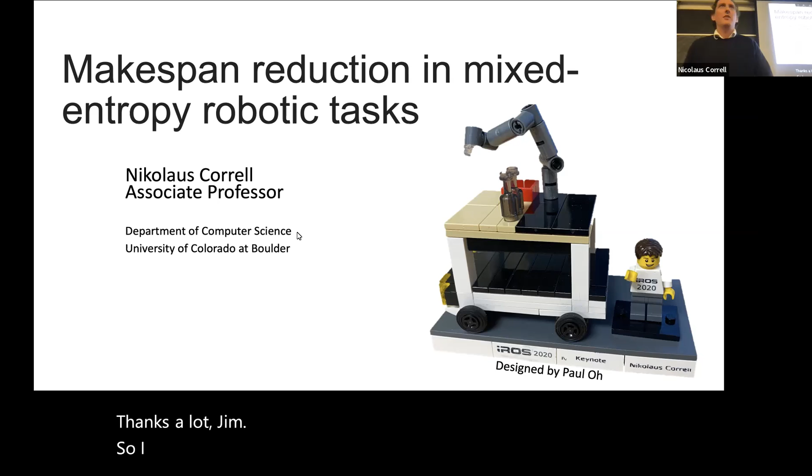Thanks a lot, Jim. So I will talk about mobile manipulation, robotics, and the things that I've done in the last 5 years in that space.

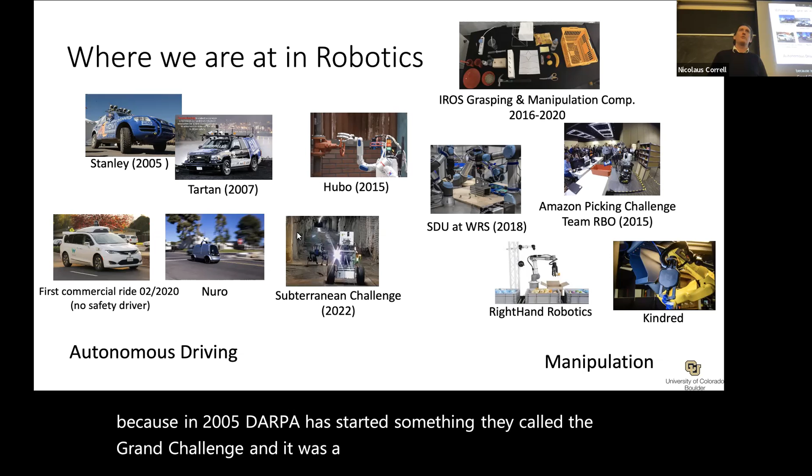I want to start with a little overview of where we are at in robotics, and what I chose is competitions that really drove the field. In 2005, DARPA started something called the Grand Challenge, a car that had to drive through the desert to Las Vegas. The Stanford team won that with the Volkswagen in 2005. Then 15 years later, we had the first commercial ride from Waymo with no safety driver in 2020. And we also now have companies that deliver food and things like this.

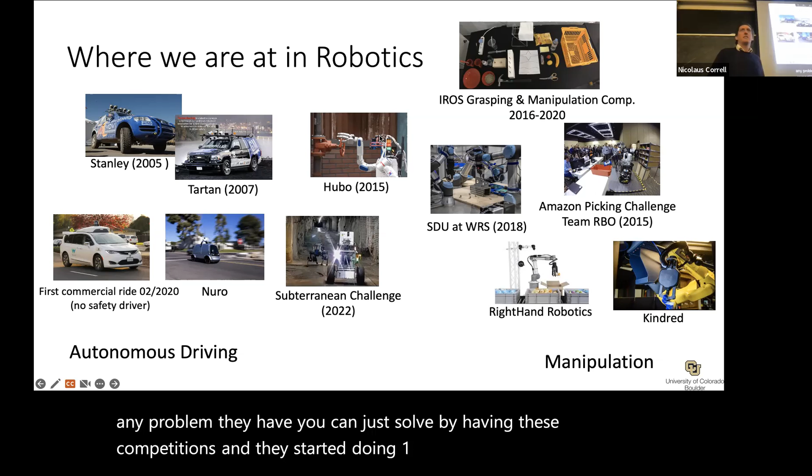DARPA got really excited about the idea that basically any problem they have, you can just solve by having these competitions. They started doing one in mobile manipulation with robots walking around that had to open this fire hose thing and drive a car and things like this. This was a complete disaster because the robots all flipped over and things like this.

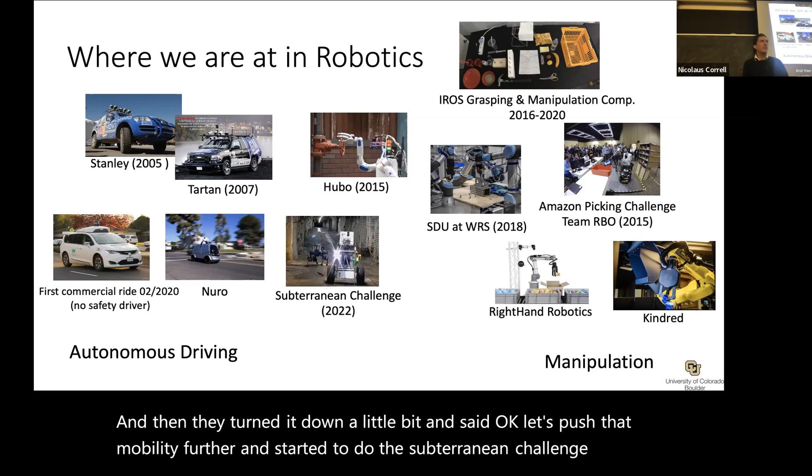And you always see videos like this in our classes. Then they turned it down a little bit and said, okay, let's push that mobility further, and started the Subterranean Challenge, which Chris Heckman, Sean Humbert, and Eric Frew won third place and $500,000 this year, which is really great. But manipulation is just too hard right now.

At the same time, the research community has started to organize competitions at conferences, and it always looks like this: there's a bunch of stuff that they think people have at home, and ideas like, oh, take the scissors and cut something out, and then they just see what happens. We've been participating there from 2016 to 2020.

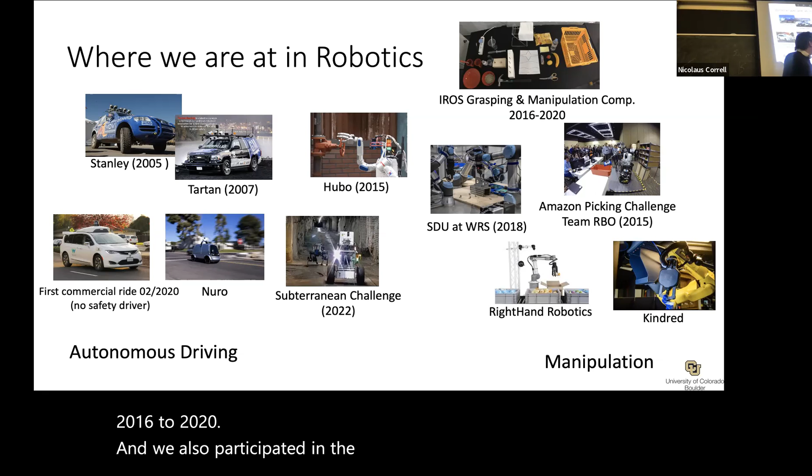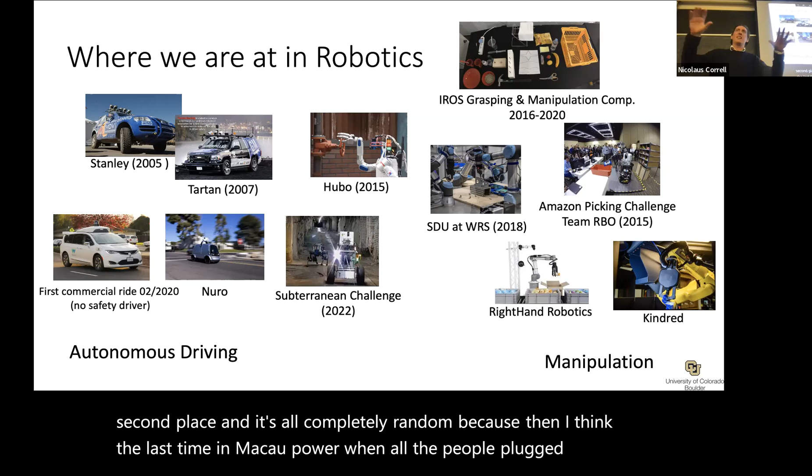We also participated at the World Robot Summit, which is an industrial robotics competition, and at the Amazon Picking Challenge. We never won anything, of course, but we did participate and got second place, and it's all completely random. The last time in Macau, power, when all the people plugged in the robots, started shaking, the robots turned off, nothing worked anymore. So competitions are really not the environment to test things.

But it didn't really become a commercial success. Amazon did this picking challenge a couple of times, and now we have Right Hand Robotics, which is a rather big company, and Kindred, which was sold to Ocado, an English grocer.

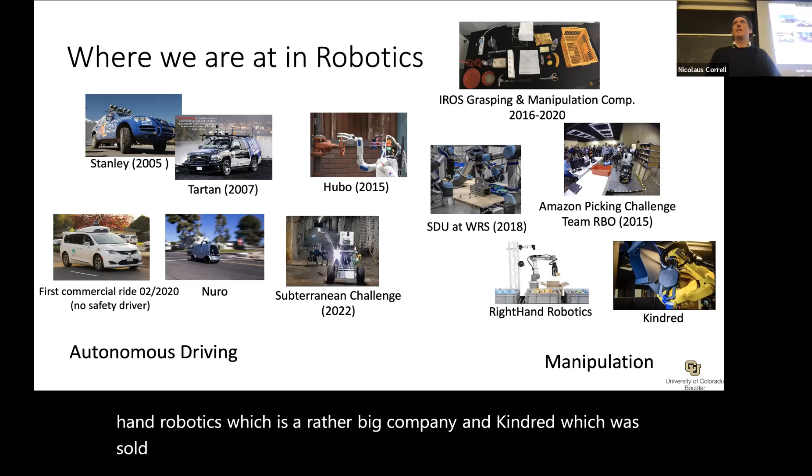But I think it's a huge opportunity still, because when you think about it, the whole consumption chain from raw materials—they get made somewhere, then shipped and stored, then shipped again, then they get consumed, and then they get recycled—technically all of these things require a lot of manipulation along the way.

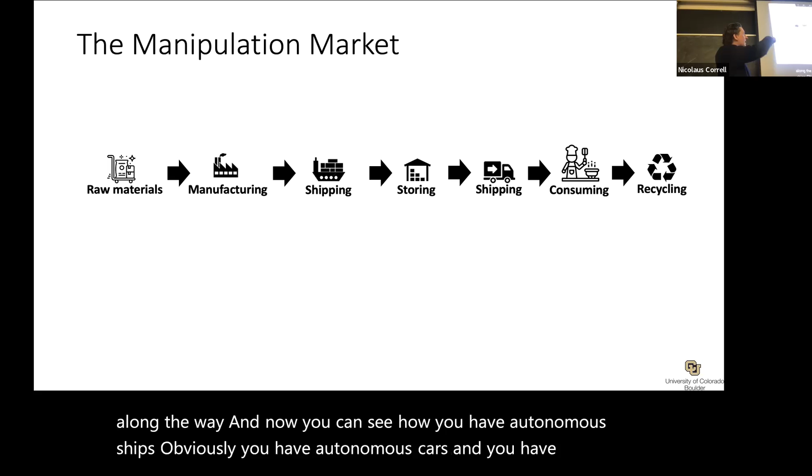Now you can see how you have autonomous ships, obviously, you have autonomous cars, and you have autonomous carts inside the storing facilities or the manufacturing centers. So people are working very hard on automating all of this, but what they cannot do is automate all this manipulation.

When you look at companies, for 30 years big companies have offered manipulation of that nature. In the car industry, people do welding. Recently you might have seen Boston Dynamics made a big splash unloading trucks with these weird robots. Then you have warehouse robotics.

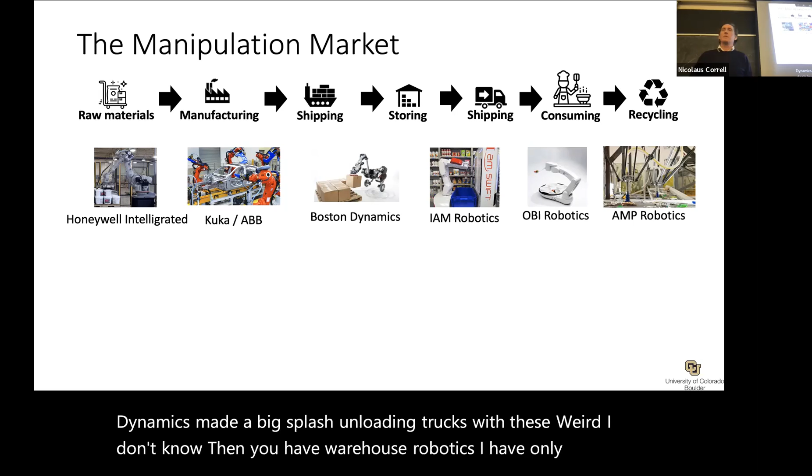I have only one example, but there are hundreds of companies. IAM Robotics—for consuming, this is a robot that can feed people who have Parkinson's or are otherwise handicapped.

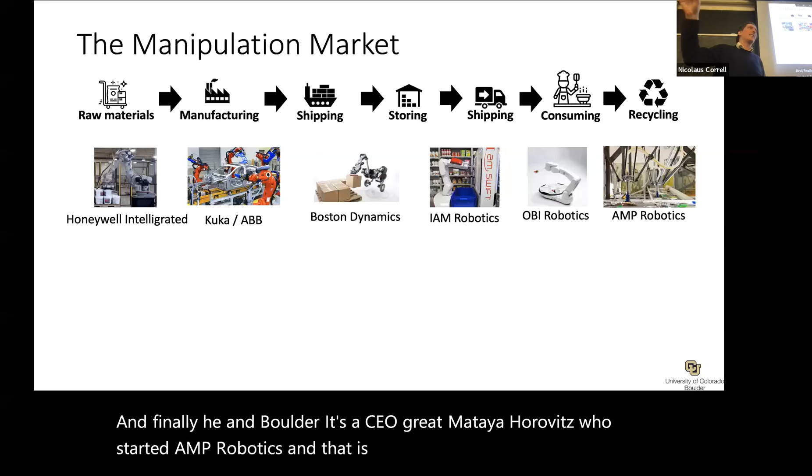And finally, here in Boulder, it's a CU grad, Matanya Horowitz, who started AMP Robotics. That's about picking trash out and recycling. They raised a lot of money and are very successful right now with that company.

But all of these are very specific solutions. What we really want in robotics or computer science is general manipulation, and to move away from these purpose-built things. I can do all of these tasks you've seen because I have two hands and eyes, and I'm reasonably skilled to do these things, but robots are still far away.

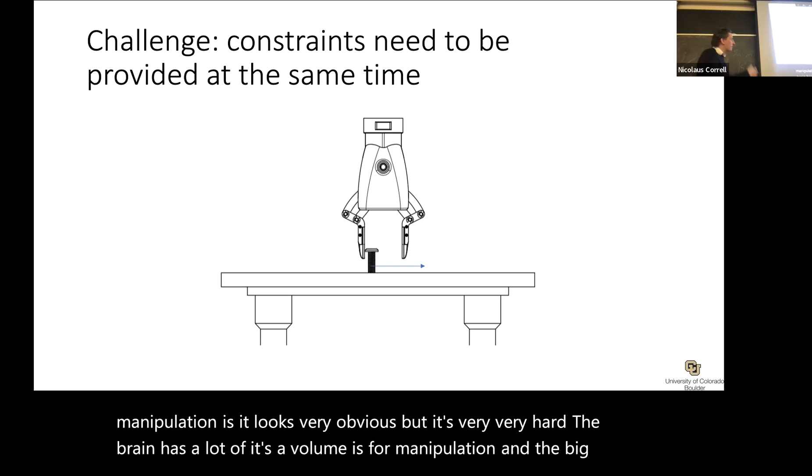So let me start with a tutorial on manipulation. The problem with manipulation is it looks very obvious, but it's very, very hard. A lot of the brain's volume is devoted to manipulation. The big problem is providing constraints on such a thing at the same time.

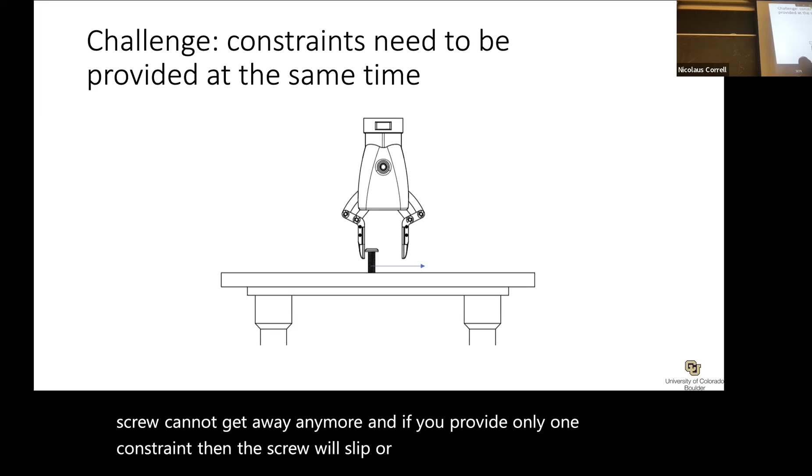When I say constraints, I mean that the screw cannot get away anymore. If you provide only one constraint, the screw will slip or fall. Once you're ready to provide the second constraint, then it's gone. So it's difficult. One way to do this is to increase the accuracy at which you perceive the thing you want to manipulate. Then you can plan better.

And that's how we started out. We came up in 2016 with a tactile sensor. I think I showed that before, but just a little history—this is one of those competitions.

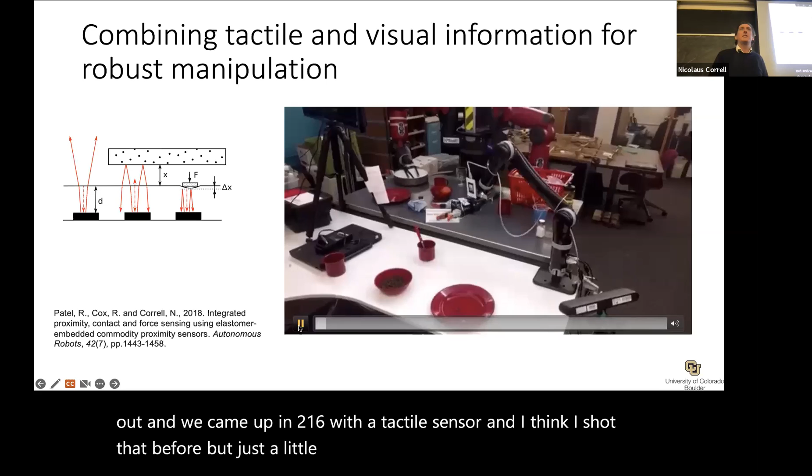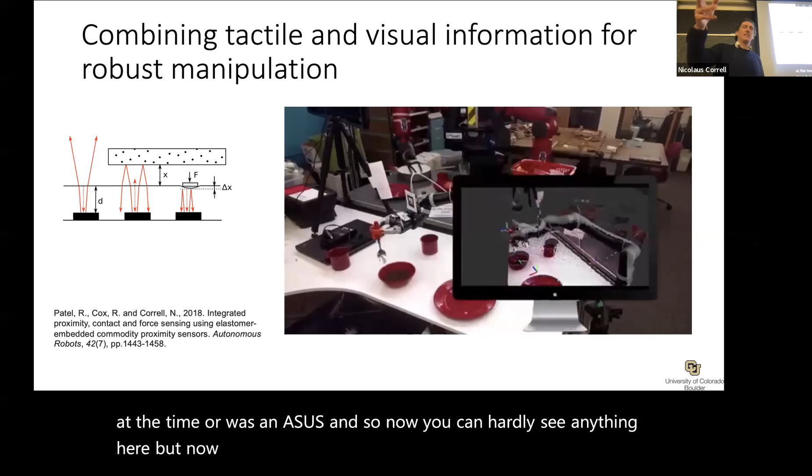Now the robot has these fingers that are augmenting that very bad Xbox Kinect we used at the time, or was it an Asus. You can hardly see anything here, but it goes and figures out where the spoon is, then uses the tactile sensors to avoid smacking it, and can grasp it. Then there were tasks like getting beans out of a container and pouring them over, and they got points that way.

So I got really excited, and we started a company to sell these tactile sensors. I did sell them, but then—I'll get to that later. So this is how it looks.

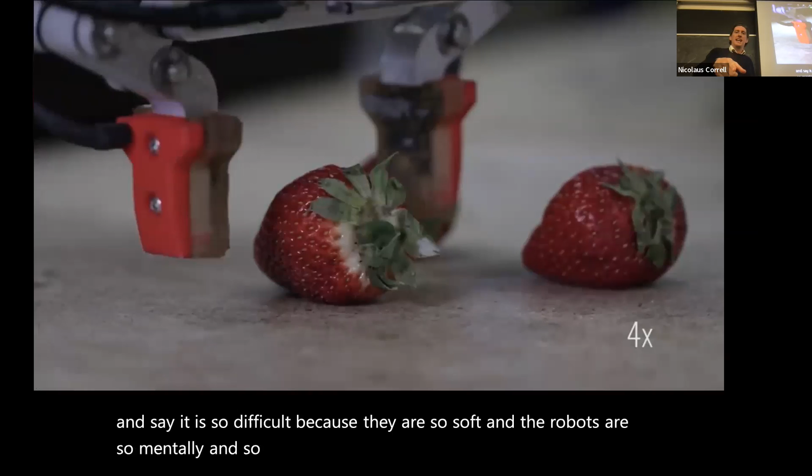We came up with these sensors and made a hand, and then we grasped strawberries. People always grasp strawberries and raspberries and say it's so difficult because they're so soft and the robots are so metally. The idea was to use these sensors to detect the touch event, which it actually does, and also so that you don't squeeze into the strawberry.

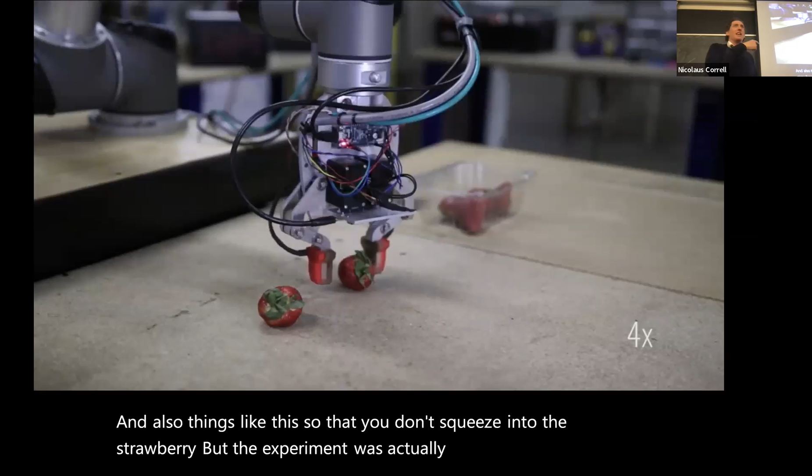But the experiment was actually funny, because my people then told me they didn't actually use the sensors—too lazy, because it's too much code and too much work. And the thing is, it actually works without the sensors.

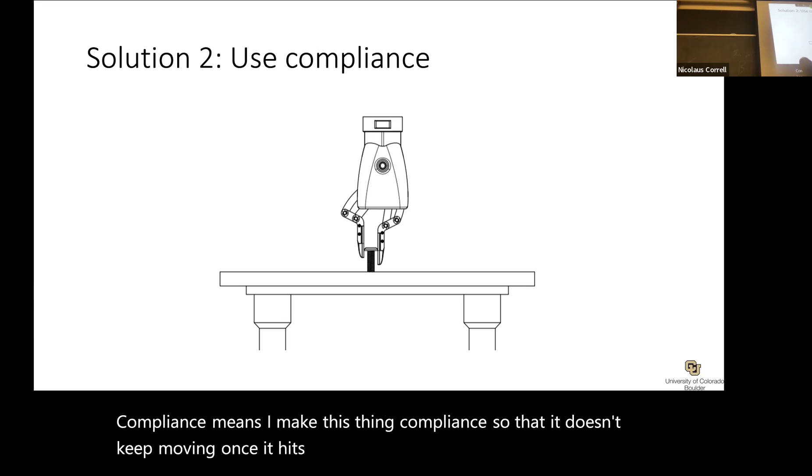The reason is you can use compliance. Compliance means I make this thing compliant so that it doesn't keep moving once it hits something—it stays there, and then the other finger moves in. You can do that so gently that you can even pick up strawberries.

When we realized this, we forgot about the tactile sensor, and we just said, well, the key is—which happened also at the same time—Intel came out with a really good camera that could see very close. So we built a hand that has the Intel RealSense here in the center, with two individual motors that can do torque control.

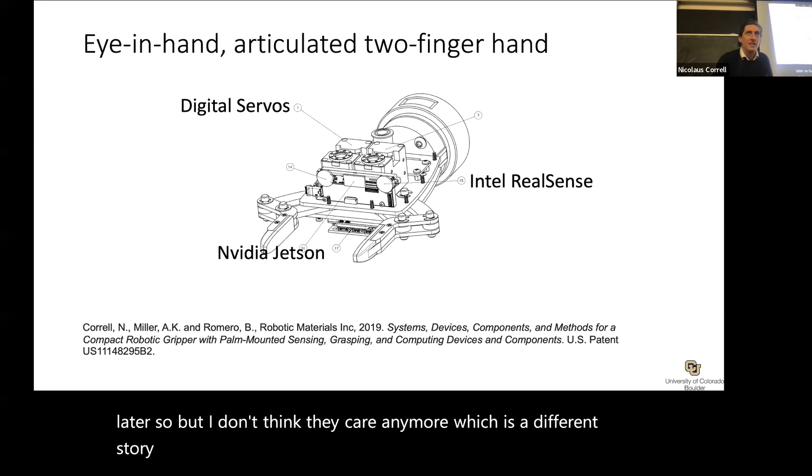We got a nice patent, and now Google also has a patent like this, but it's later. I don't think they care anymore, which is a different story, because right now robotics is not the hottest field on the planet. But it's nice because I think this is a very good idea to use this camera in the hand with these articulated fingers.

So in case you don't believe me, which you shouldn't by default, you can get these strawberries the same way without these sensors, just using motor control so gently that you don't squeeze them.

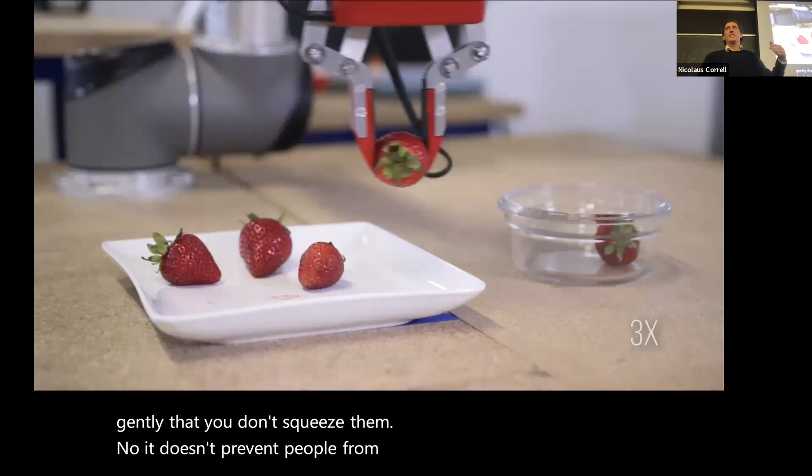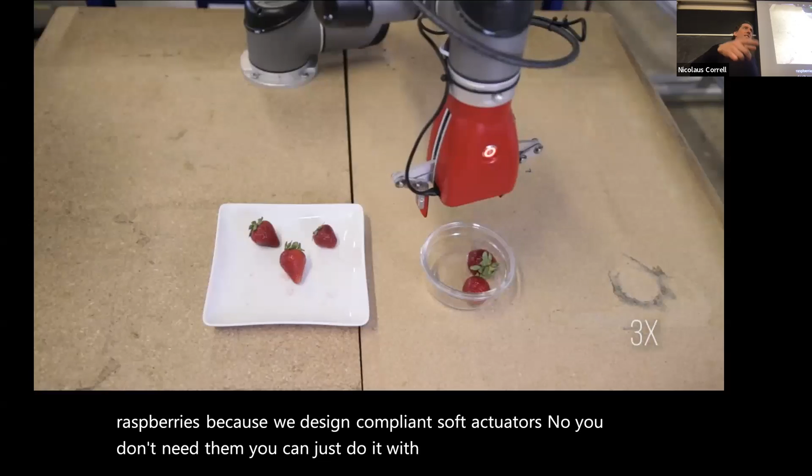Now, it doesn't prevent people from publishing papers on soft robotics saying, now we can finally grasp strawberries and raspberries because we designed compliant soft actuators. No, you don't need them. You can just do it with conventional mechanisms, and you're better off, because this hand can do anything, while the soft gripper can only grasp raspberries—otherwise it's too floppy to do anything.

So that's that. There's a picture which we have in this patent.

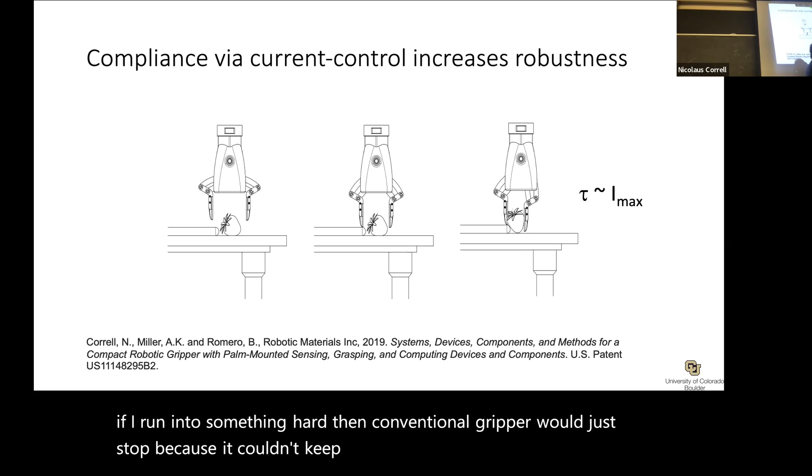The idea is if I run into something hard, a conventional gripper would just stop because it couldn't keep moving. But this will just move the other finger in a little more until it provides enough force onto the object to take it with it.

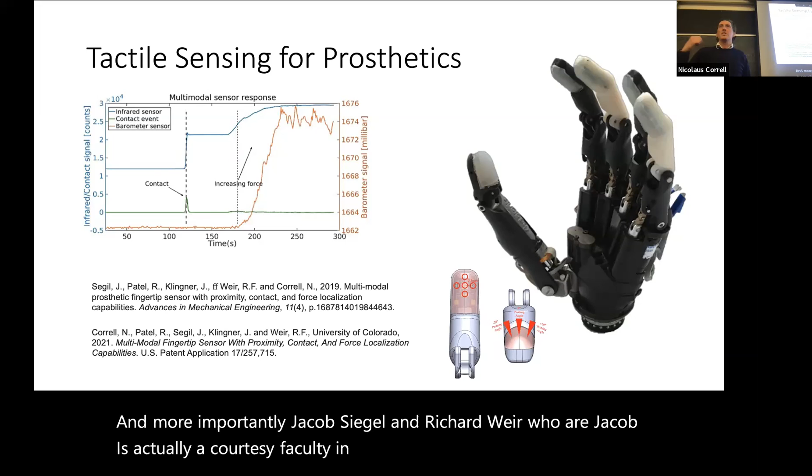Now, the tactile sensor is still a success. People use it in Japan, and more importantly, Jacob Segil and Richard Weir, who are, Jacob is actually a courtesy faculty in our department, and Richard is in Anschutz, and they do a lot of work on prosthetics.

And there it's very interesting because you don't have a camera, but prosthetic people cannot feel anything. So what we've done is we took this sensor, and it has these nice properties that it can detect contact, and then you see as you increase the force, you finally touch something. But not only that, it uses multiple different sensors together, and there's some machine learning.

I don't want to talk about it much, just so you see when you set out somewhere and you want to solve some industrial problem, nobody cares, but then you find a different application, which actually is quite successful right now. So with this hand that we built, we could do a lot of really cool stuff.

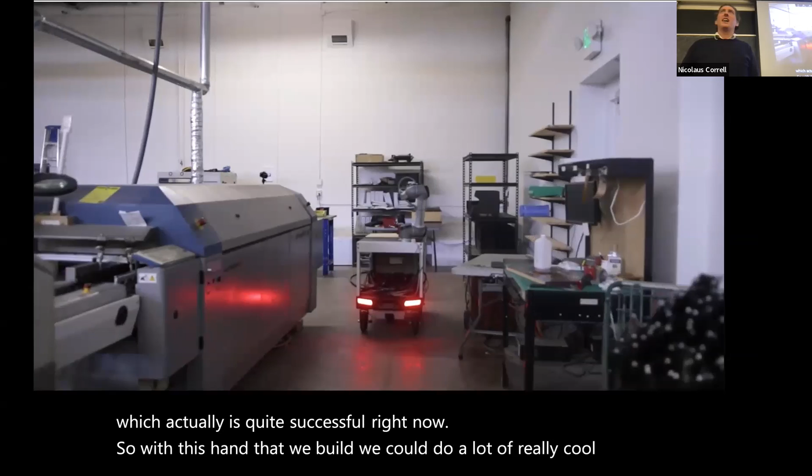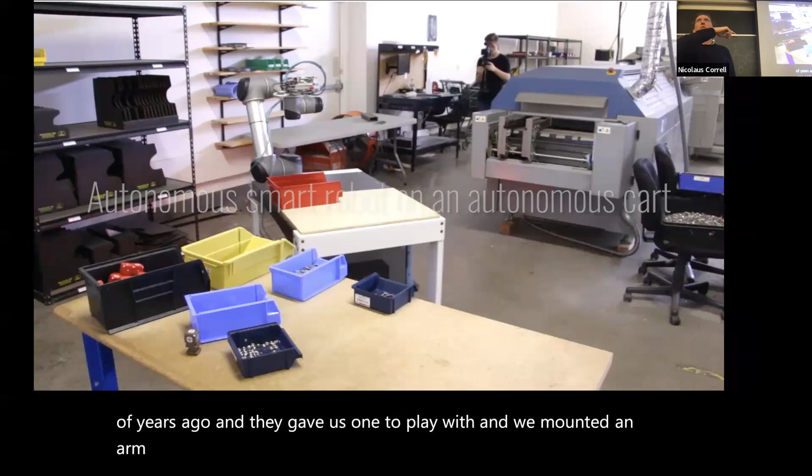And this is the Canvas cart that is a spin-off from our students a couple of years ago. And they gave us one to play with, and we mounted an arm. So you saw this was what I had, the Lego figurine somebody made for me, which is this thing. And it can now go and pick out screws from these containers.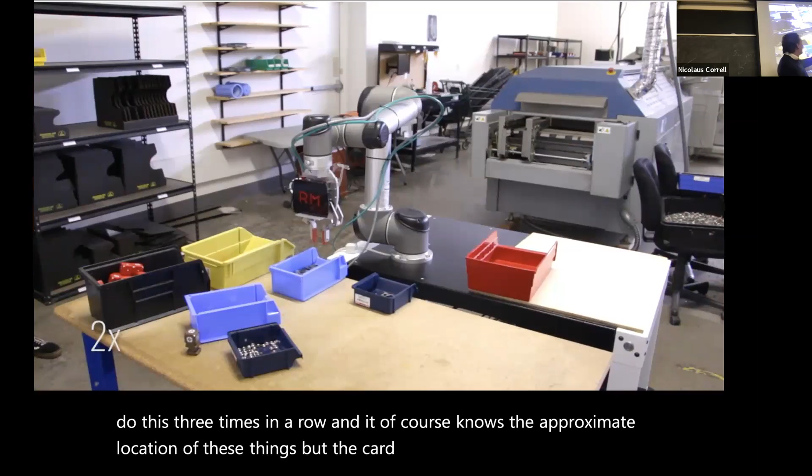In robotics, you see a lot of one-off things where it only works once, but then never again. So what we tried in this video is to show that it can do this 3 times in a row. And it, of course, knows the approximate location of these things, but the cart has maybe 10 centimeter accuracy. So it has to find the bins, and then it has to look inside the bins, and then it has to think about how to grasp them out.

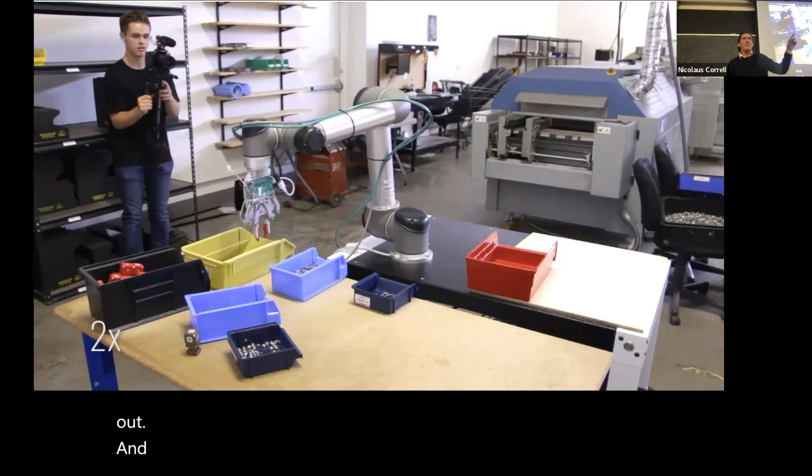And interestingly, nobody wants to buy such a thing. It looks like something that I, as a computer nerd, thinks it sells like sliced bread, but no, I can assure you there's very little commercial interest into this. And I know, I mean, it's complicated. We can talk about it, but now other companies, actually Amazon just shut down. They bought it for a few hundred million dollars, and then they just shut it down, this whole canvas thing.

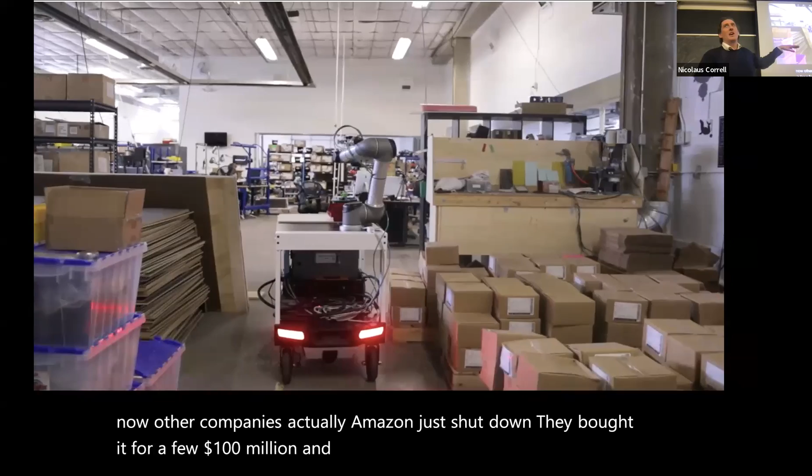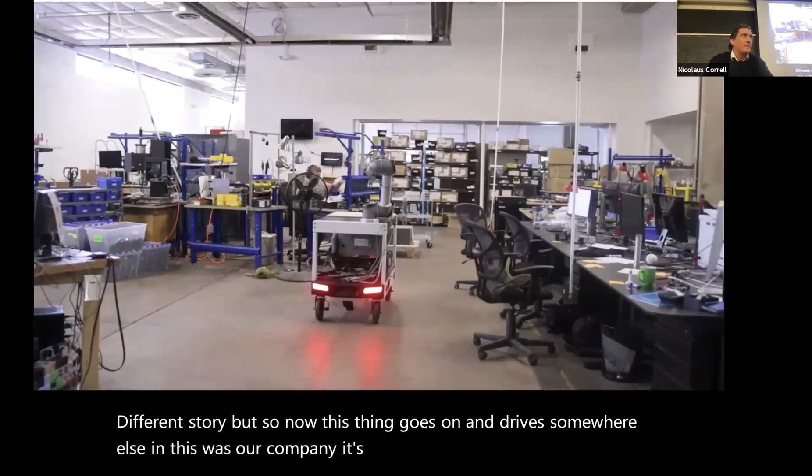Different story. But so now this thing goes on and drives somewhere else in this. This was our company. It's actually Modular Robotics. It's this company in Boulder that makes the cubelets. So this guy is working on cubelets. And it navigates through this, and it can then go and do its trick a 4th time.

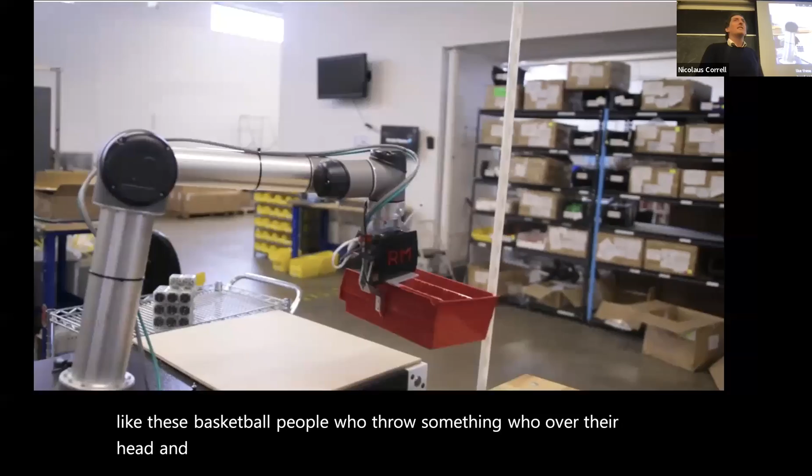And we don't have to film this 1,000 times like these basketball people who throw something into a hoop over their head on YouTube. We only had to film it 2 or 3 times. So I think it now delivers the bin.

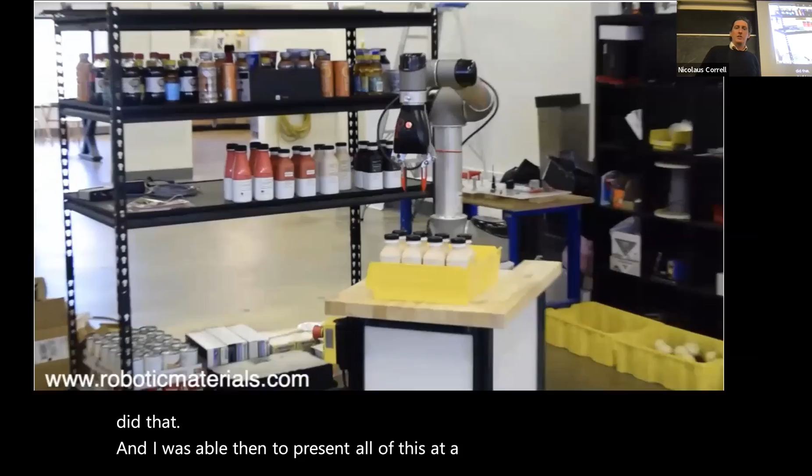Okay, so I have another video to show off what this can do. And so just so you see where we are at with manipulation, and I do think these are still groundbreaking, or they have been groundbreaking at the time because nobody really did that. And I was able then to present all of this at a robotics conference in a longer talk because people took notice of it, even though we didn't publish any of this.

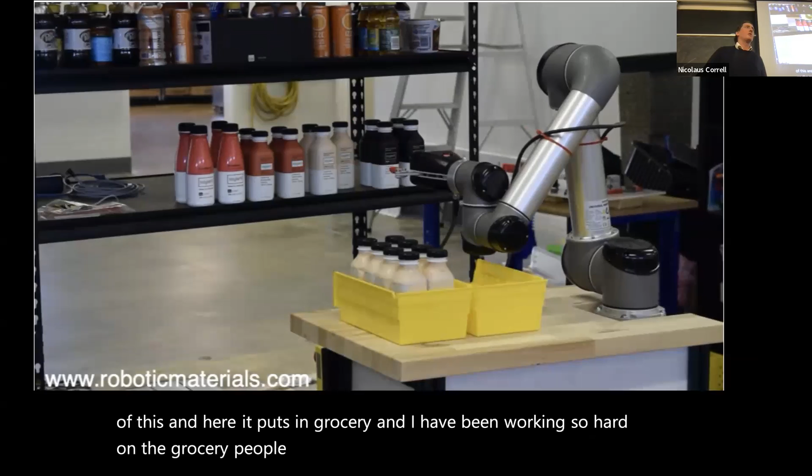And here it puts in grocery, and I've been working so hard on the grocery people. Hey, don't you want robots? Stock your shelves, unstock them. No, nobody cares. People are very good at this, and it takes forever.

And so this is partly scripted, partly not. The idea is really to find these bottles using, at the time, SIFT features. And now it actually unstocks the old ones, so it can put in the new ones to the back, and the old ones are still in front.

So which we said is a great business case, but no. So this is neat, and it actually looks also where it has to put it every time. So it's not just scripted.

And again, the cart cannot move more than, this is actually a MiR cart, which you can buy commercially, and it cannot move more accurate than 10 centimeters. So when it arrives at this shelf, it has to look and use sensors and everything to do that. And then once it knows where to do it, it can do these pre-rehearsed behaviors.

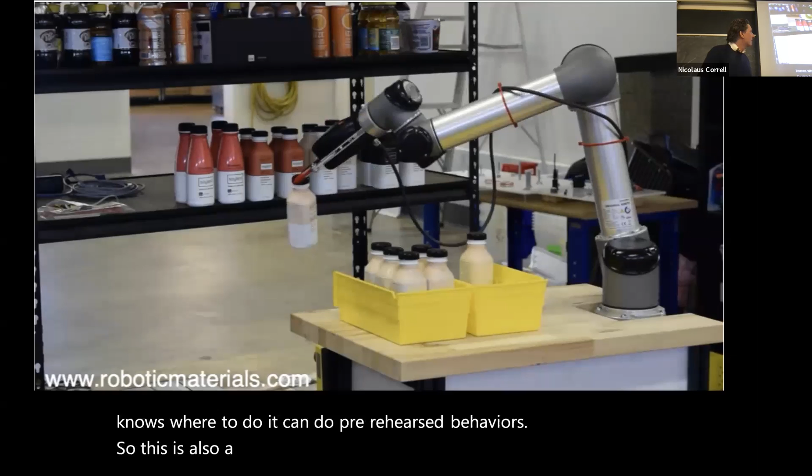This is also a neat trick that Austin came up with, who designed the hand so it can flip around on these bottles. And that works very reliably. But again, it didn't happen here.

So how does this work? What we came up with is to use this 3D camera inside the hand. The revolution at the time was that you can see down to 11 centimeters, whereas the Kinect can only see 50 centimeters. So this can see very close, but there's a dead zone.

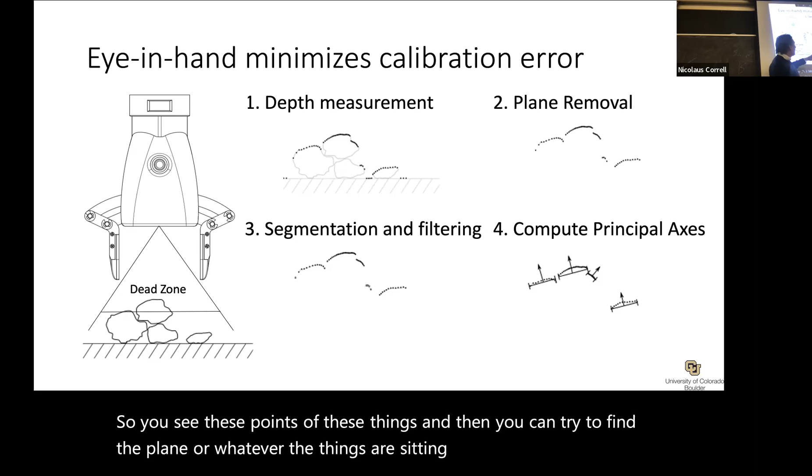Then you get the point cloud, so you see these points of the objects. You try to find the plane or whatever the things are sitting on, or the bin. Then you use DBSCAN or an algorithm of that nature to segment those pixels together. Once you have those groups, you do principal component analysis, which sounds complicated but isn't, to get these principal axes. Once you've done that, you can see which ones are colliding. You can't see that here on the screen, but I have multiple tries and I look at which one can work. Once I've done this, I can do the grasping.

So instead of publishing this, we just put it into the textbook, so now people think it's the way to do things. I think Aaron mentioned recently that it doesn't matter who invents something, it's what the community thinks who did it. So there's an opportunity for us to send that work home and basically put a date on it.

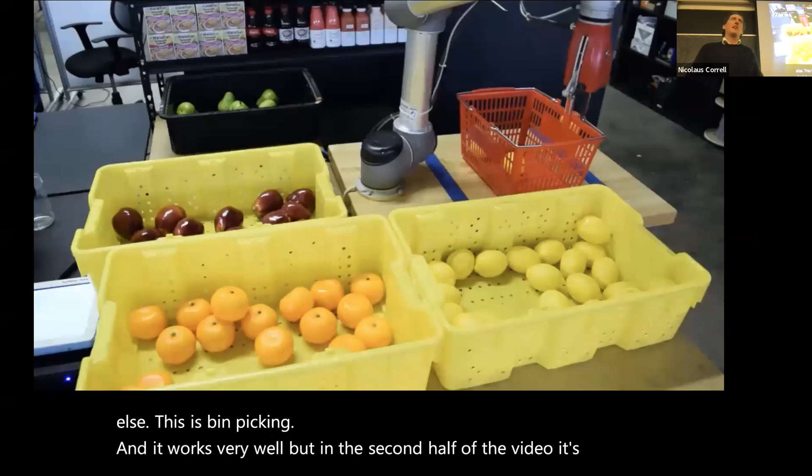So I have one more video, but now I want to point out something else. This is bin picking, and it works very well, but in the second half of the video you see some failure modes. Then I'm getting to the technical part of the talk, what we are currently working on.

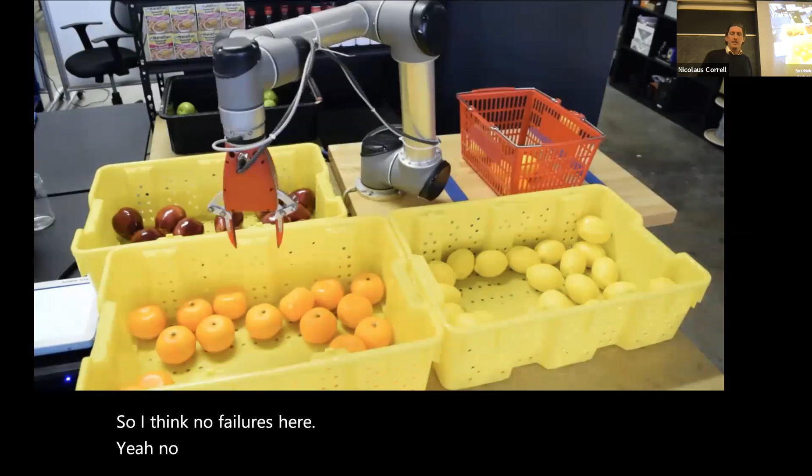I think no failures here. Yeah, no failures, so wait until it does this one. Next one will fail. Oh yeah, these were two videos I cut together, and I think I cut failures in. You still cannot sell it, no, don't get me wrong.

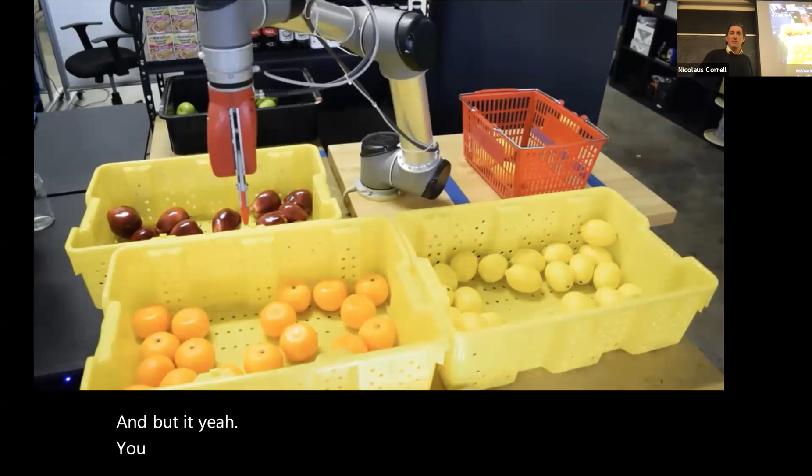Here you saw it grasped at the wrong plane because the camera thought there was something there, but there wasn't anything. Maybe it's the wrong video. Oh, here, so here it slips. These are very hard to grasp because they're plastic, very slippery. So you saw it didn't work. So what does it do? It tries again, and then it works.

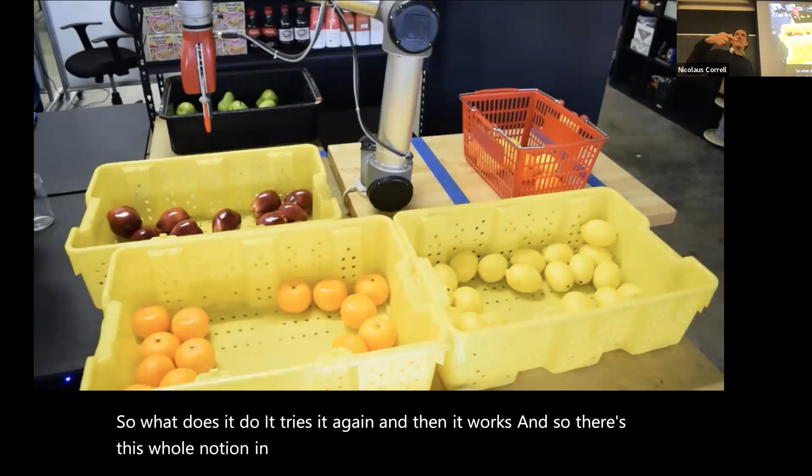There's this whole notion in robotics versus computer science: in computer science, you run the code, it works or doesn't. In robotics, you must actually deal with things not working at first. Then maybe you try it again, and people would then say, well, it did work, it grasped the apple, and maybe they don't even notice whether it worked the first time or not.

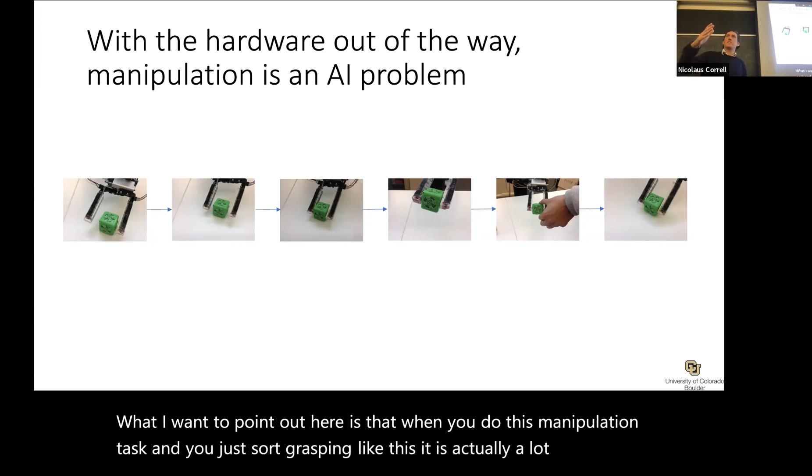What I want to point out is that when you do this manipulation task, and you just saw it grasping like this, it is actually a lot of code and a lot of states. In this case, I go to the cube, then I align myself with it because this gripper is an all-gripper which has to move together. Then I grasp it, then I lift, then there's maybe disturbance, and then I have a place event.

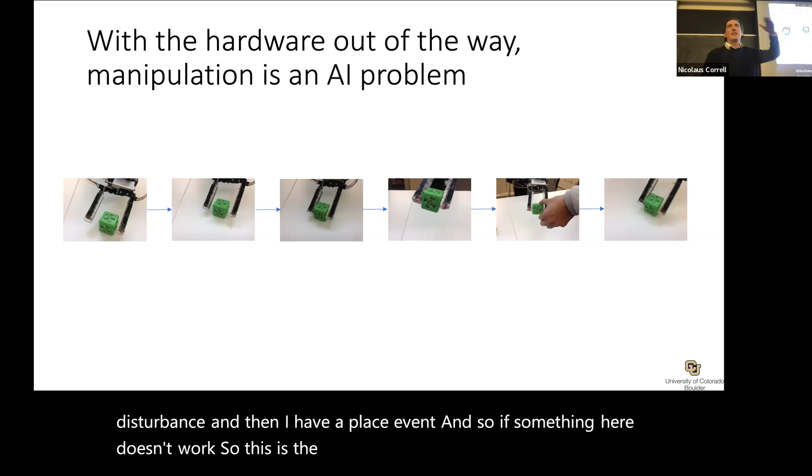If something here doesn't work, the first code you would write is like state 1, state 2, state 3, but then maybe you didn't align correctly, so you have to go back. Maybe you didn't grasp it correctly, it doesn't load, so you have to do it again. So what you have to do is add if statements. When we went to these competitions, we would add if statements till the last minute, then we would go onto the airplane, arrive at the conference site, and then add more if statements because something else would happen that we wouldn't foresee.

It's really brutal. So what we then discovered is something from the gaming industry, which now takes a foothold in robotics, called behavior trees. Behavior trees augment finite state machines with different blocks.

In this case, this is a sequence node, and what it does is execute all its leaves in sequence. There's a mechanism to provide ticks, as they call it, and whenever you get a tick, it looks in the tree to see which graph is currently active. This is a selection node, which will try all of its leaves until one of them succeeds.

In this case, it will run a state called 'ball near?' If that succeeds, the selector is done, and it goes on with the sequence to get the ball. If it doesn't succeed, the next tick will bring it to approach the ball. So then it approaches the ball, and it can go get the ball.

And again, does it have the ball? Yes, no, otherwise grasp the ball. And so this is very nice. When you go and take the ball out of the hand, it will actually realize this and go back and do it again.

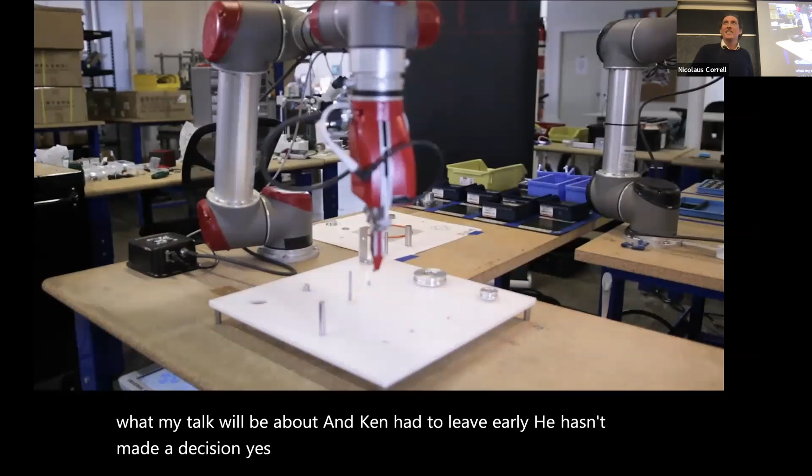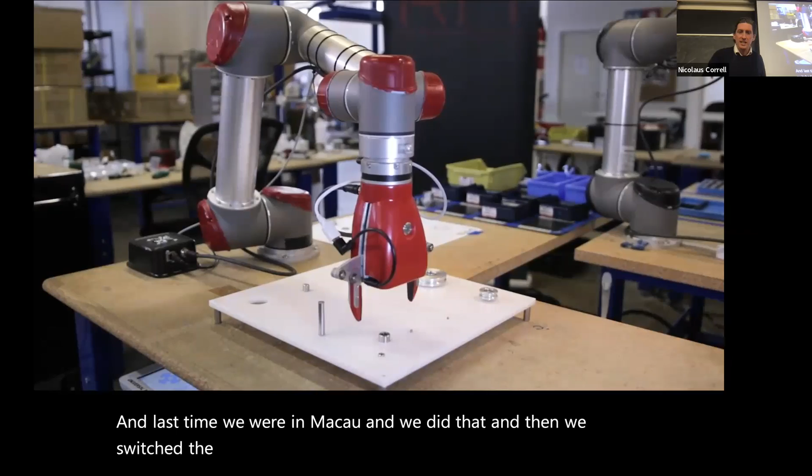And for some reason, this works much better here than elsewhere. And James Watson has taken this over as my PhD student. Last time we were in Macau, we did that, and then we switched it to behavior trees. And this goes on forever. Maybe this is actually, I'm not sure, maybe 2 times real speed. And what it does is this series of peg and hole assembly tasks.

And this is a little more complicated. Again, it's rehearsed, it's pre-programmed in a way, but it's also not, because it looks where the pulleys are, and then it uses force control to... and I will explain how that works in a second. And so this goes on and on.

But the key here is it is executing a large sequence of autonomous behaviors that are sensor-based, and will fail, and the robot will retry. You don't see it, but it will wiggle and do things like that. So do we want to watch this whole video? Probably not. I think the highlight was the pulley.

So the way this works, and James has published a journal paper on this peg and hole assembly, is you have to have some kind of torque force sensor that measures the torque and force you exert at the wrist. And then you can do things like not just position control, but say move down until you touch something, like a screw has to go into the hole.

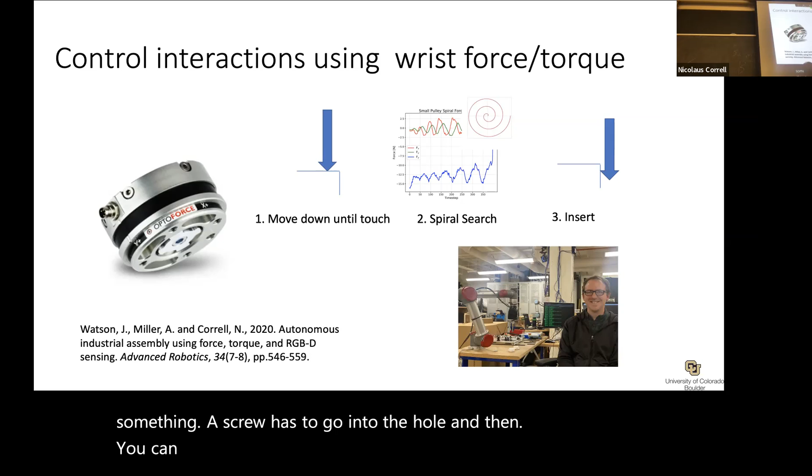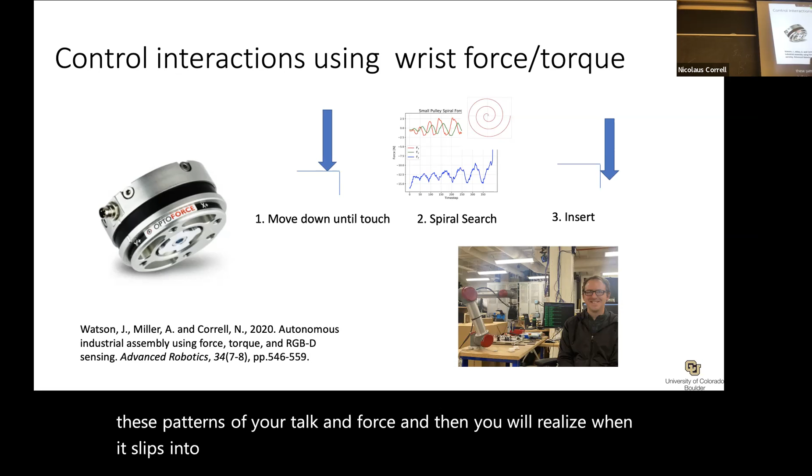And then you can execute some kind of spiral search pattern. We have different search patterns, doesn't matter for now. And observe these patterns of your torque and force. And then you will realize when it slips into the hole, and then you can push it down. So this is a very tight assembly task, which is also difficult when you do it yourself. Like when you're a human and you go into the lab, and James has that stuff, you take the pulley that he wants to insert, it's actually difficult to do.

So the question is, and this is the main point of the talk today, can we speed up the assembly by detecting failures early? The way this would look like is: I try, and then I fail, somehow there's a timeout, and then I try again, and I try again, and finally I succeed. So this is very typical of what robots would do.

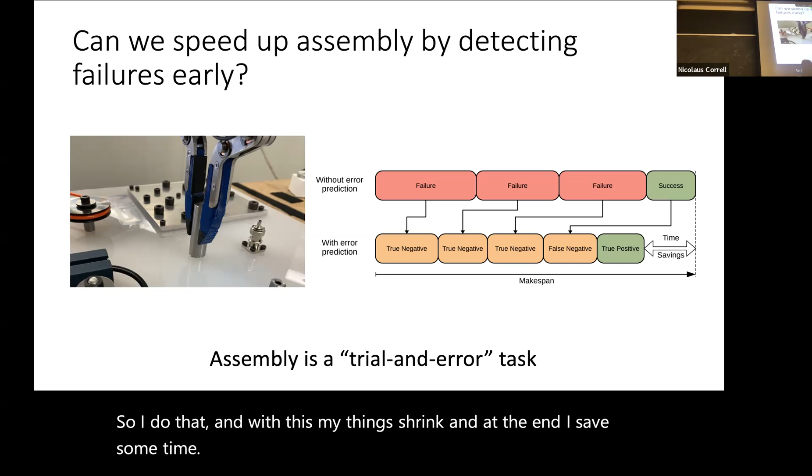But now, if I can detect the error early, I could say, oh, this will be a failure, so I stop it and start over a little earlier. I do that, and with this my wasted time shrinks, and at the end I save some time. That is the idea. And this took us very long.

Now, the idea is to combine this with this behavior tree framework, because the behavior tree, by definition, must know when it's done with very high or very low uncertainty, because otherwise the behavior tree wouldn't work. So now the idea is I have this behavior tree for my twist insertion, but now I could have a classifier, and this is a parallel node, meaning all of these things are done in parallel, and it always does something in this bigger tree.

And what it does in parallel is it records the force-torque data, and then it runs this classifier that I want to have, which helps me to say whether something will fail or not.

So this is how a failure looks like. Can you tell from this? No, but maybe machine learning can, and it does. Just so you know, because I never showed you, this is the kind of data. This is the Z direction, so it goes up and down, and the other things are not so interesting. And then you see some peaks here, the torque about the x-axis is rising. And so I'm telling you this is a failure. Why? Because it failed - that's how I know this is a failure.

I cannot tell from [the data alone], and so what we've done is we thought a lot about how to classify this. We used recurrent neural networks, LSTMs, and all sorts of stuff, and we realized the best thing is something called a dilated fully convolutional network. When it's dilated, it skips input in the data - it skips some pixels in an image, or skips some time in this kind of temporal data. Fully convolutional means it only convolves.

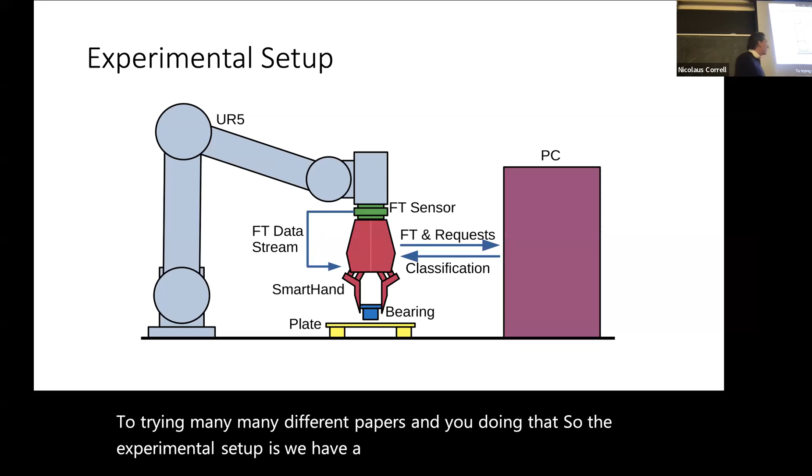So the experimental setup is we have a robot that has to assemble this bearing, and it uses the smart hand you've seen, which has a computer built in, and it uses the force torque sensor. The data comes in, it makes its decisions, but now it also sends the force torque data to another computer, which classifies it and tells the hand whether it will work or not.

So we trained this network - we assembled this 250 times, and we disturbed it a little bit because otherwise it fails only like 1% of the time, and then we'd only have 2 or 3 samples. So we had to add some noise, a position error with standard deviation of 1 millimeter in the Gaussian distribution. With that, it failed half of the time, and now I have enough samples to train my detector.

The way this works is the detector waits 7 seconds for the window to fill, and then it starts saying whether it's going to be success or failure. We have a threshold at 90%, and only if it reaches that do we decide and make the call.

So this one here is a true negative - it's very clear that it's failing from the beginning on. There's a 70% chance of making it, but then it drops off really quickly. Later it thinks again it might be a success, but we know it's not.

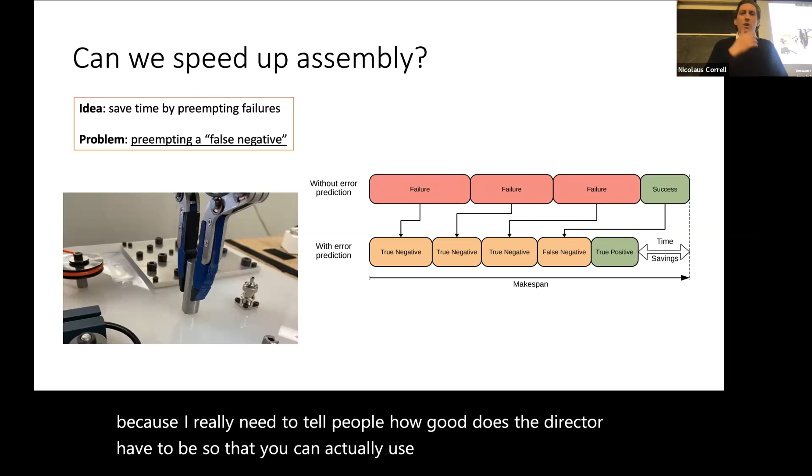So it did work. And now the question is, of course, that's not very interesting, because I really need to tell people how good the detector has to be so that you can actually use this.

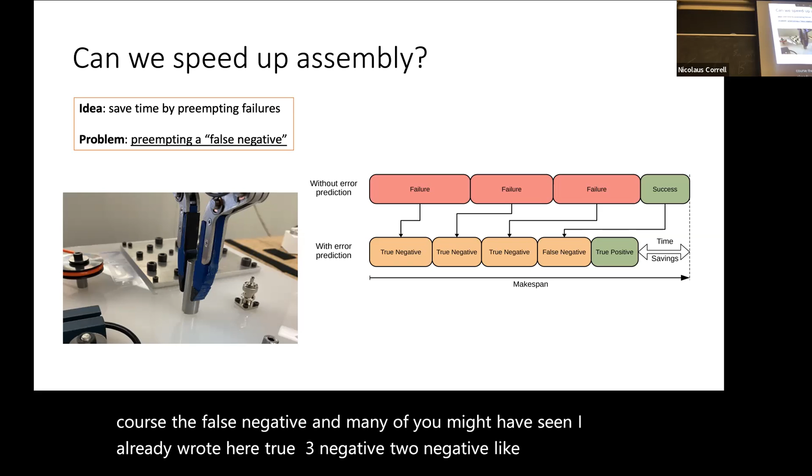So the problem is, of course, the false negative - many of you might have seen, I already wrote true negative, true negative, true negative like these, but here I have a false negative that I shouldn't have stopped, because this would have been a winner. So I lost all this time, and what I claimed here is I will save time - in the worst case, the policies will be the same, so you don't really lose anything, but it's still possible they could even be worse.

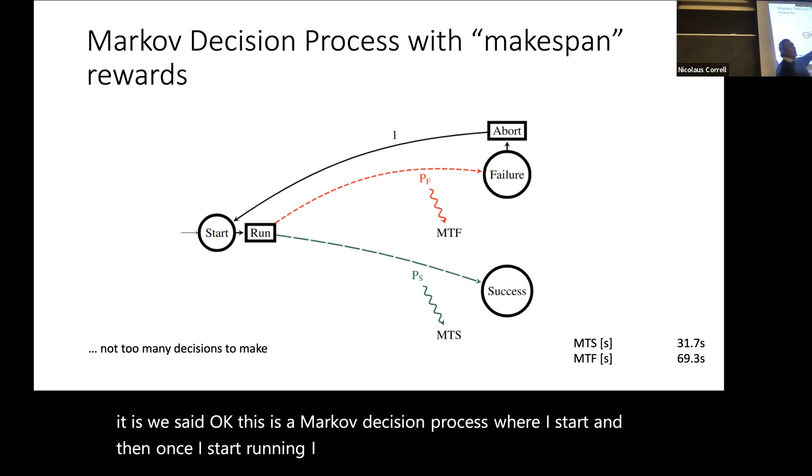They could be worse, and I have the answers for this. The way we did it is we said, okay, this is a Markov decision process where I start, and once I start running, nature takes its course, and I have a failure or a success. The rewards are the mean time to success - how long does it take on average to do this insertion, and how long does it take on average until I fail. So now I have a Markov decision process with no decisions, because there's only one policy: whenever I fail, I abort and start over and try again. So that's all I can do.

I do that so you see the structure of it - how the rewards work, how the probabilities work, and all of this. This is the MDP for the trial and error task.

Does your MDP actually track how long a task has been running, or is it just that you know the task is running?

I know it's running, and I assume it runs with these average numbers, which is the mean time to success. If you think about this picture, the time length, I have these data. So you can now solve this with value iteration or something to give you the policy.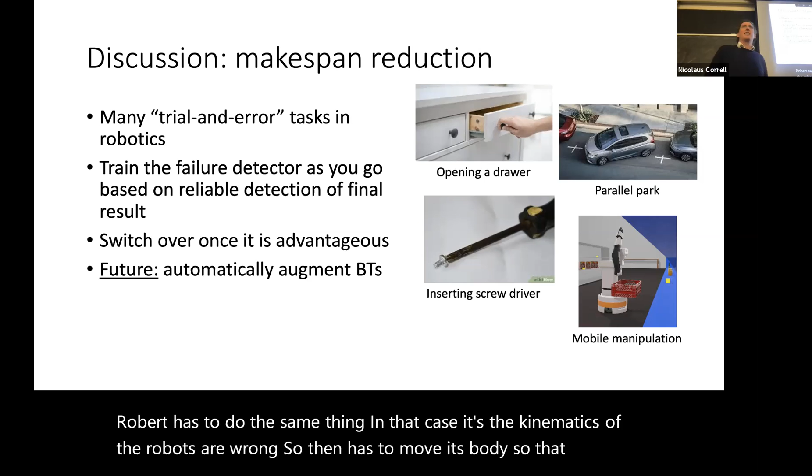Parallel parking is another thing. You don't do it much in this country, but when you do, I see it sometimes on the street - you try that and say, oh, it doesn't work, so you try again. What you need to know is some prediction of whether it's going to fail or not. Inserting a screw is something like this too.

And then I think mobile manipulation in general, because there's so much uncertainty - this is from the Intro to Robotics class final project, the students have this robot and have to grasp cubes out of shelves. They're yellow and simple, but still there's noise and problems.

Now I think the interesting thing is, now that I have this framework, I can have the robot in my house or the car, and I can actually train the failure detector. All I need is a very low uncertainty signal that tells me whether I made it or not - I just have to know the car has made it or not, the drawer is open or not, and usually I can tell that with very low uncertainty.

So if I have that, then I can train this detector, because all my trials will contribute to this. And I can now switch over - which we haven't really tested - once it's advantageous.

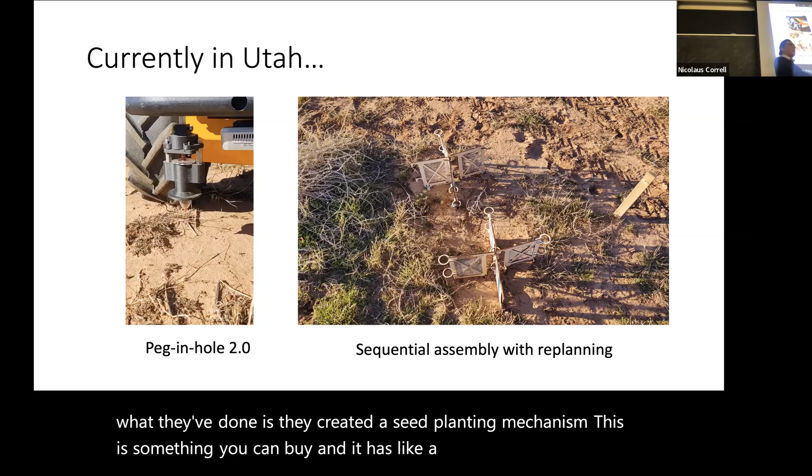So we have a project where a robot should do that in Utah. James and Kristen are currently there, and they've created a seed planting mechanism. This is something you can buy—they bought a mechanism that will shove the seed in. I think this is also a trial and error task, because you might hit a stone or something like this. We don't have force sensing yet, so it's a little premature to call it that.

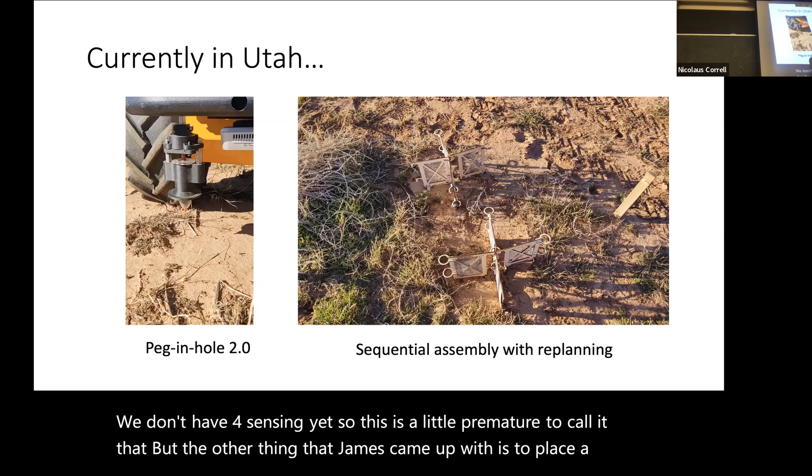But the other thing James came up with is to place so-called con mods. This is an established technique—people do that already. They place little meshes that look exactly like this; James built that himself. You place them into the landscape, the dust collects there, and that's where vegetation gets a foothold and reclaims that environment.

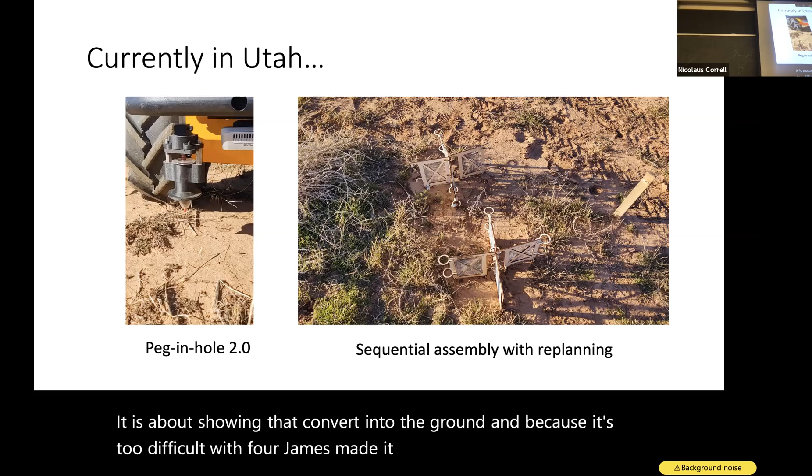What we want to do, because we're interested in peg-in-hole assembly—we're really only interested in peg-in-hole assembly, so all of this is peg-in-hole assembly—is shove that con mod into the ground. Because it's too difficult, James made it 4 pieces, and you have to assemble them, but maybe the 4th one doesn't work, so you have to go back, take the whole thing apart again, and do the assembly then.

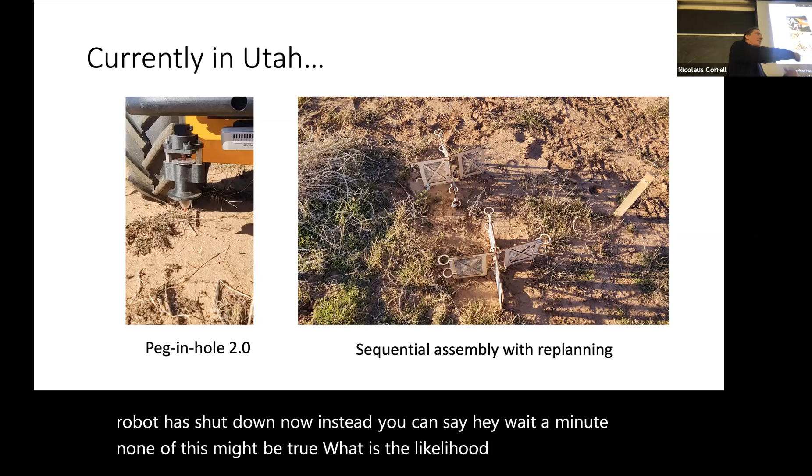That's something I'm very interested in, because in assembly maybe you make a mistake and think it's a true positive when it's actually a false positive—it told you it was all right, and then you fail much later, and the robot has to shut down. Instead, you can say, wait a minute, none of this might be true—what is the likelihood of me going backwards in time, undoing this, and actually correcting it? So we want to do this, and it's very easy—we don't have to travel to Utah to try this, we'll do it here.

What we also do for this replanning—Dylan Kriegman is doing a senior thesis with me right now—we want to revive STRIPS a little bit, and it's actually not dead. There are many conferences on PDDL, and that field keeps pushing forward, expanding that logic and language-based reasoning.

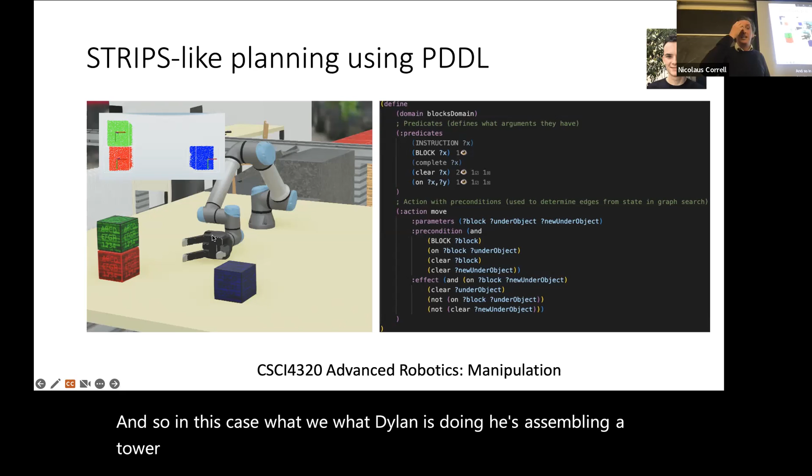In this case, Dylan is assembling a tower of blocks in a simulated environment—the robot sees these things, but then tries to write down a PDDL description for the problem, and you see this action to move the blocks. There's a precondition that the blocks have to be somewhere, and an effect that the blocks are later somewhere else. What we hope is to get this PDDL planner to work with a reasoning engine that reasons about the uncertainty of all these things, and then says, okay, at this point I believe the tower didn't fall, so I don't have to go back, or maybe I placed the block the wrong way, so I have to replan the whole thing.

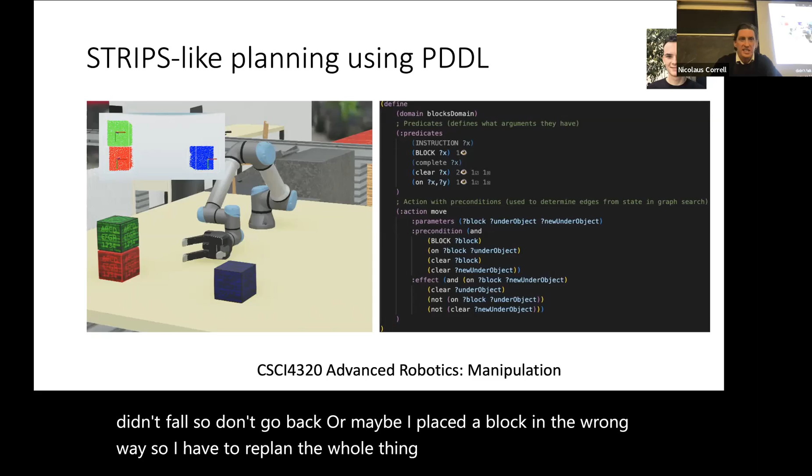So that's ongoing work, just started. What we also do—Steve is doing a master's thesis to make the hand that we have, and that we sold for a couple of years but then stopped selling because not enough people wanted to buy it, too complicated—into an open source version.

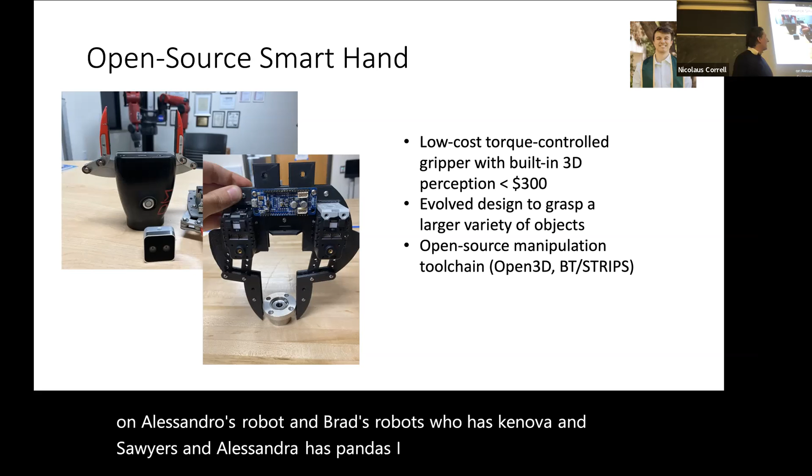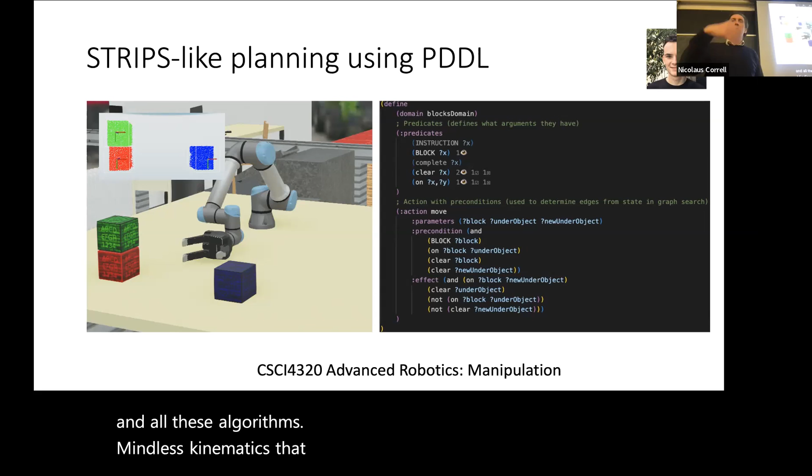The cool new thing is Intel shut down the RealSense project, only to revive it and come out with a new RealSense, even smaller, which fits right here. So now, instead of having $5,000 in parts, we have like a $300 gripper that we can hopefully put also on Alessandro's robot and Brad's robots, who has Kinova and Sawyers, and Alessandro has Pandas. I have the Universal robot, and use all of these open source tools like Open3D that we use in the class, and all these algorithms for inverse kinematics that we developed here, and push them out for people to use.

So to discuss this, manipulation requires constant replanning due to failure. This is really what I learned. It's not just to realize that you haven't made it, you have to actually reason about these things in a very involved manner, especially if you start considering false positives and false negatives. So the robot tells you I did it, but it didn't, or the robot tells you I failed, but it didn't.

Even a simple thing like picking up a cube has already 8 different states. Doing an assembly like you've seen has thousands of states. It's very complicated to manage. I think these false negatives and false positives will not go away, but they become more as soon as you venture into more interesting domains. And so I think you really have to do inference over all the possible states something can be in, and backtrack. All right, so that's it.

I think I could demonstrate to you that picking and grasping and precisely applying forces to objects is really a solved task. What is not solved is the business case. And it's a very difficult, completely different conversation why people don't need that. I think manipulation is now really a probabilistic planning problem. It's very challenging, but you can do it on a tabletop, so I like it.

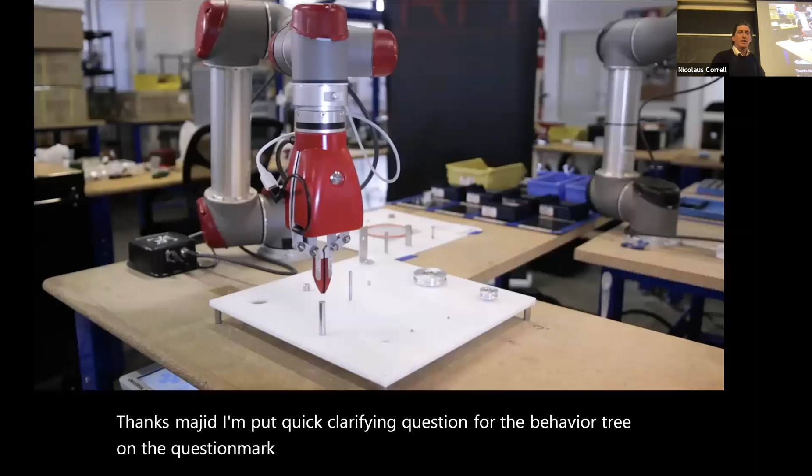Thanks, Majid. A quick clarifying question for the behavior tree on the question mark selector - is it better to just have a binary option, or can you have more than binary? Yeah, you can have ball near, battery charge, whatever. So in this case, actually, it will stop once the first thing succeeds, so you have to sort them to what you want to get done first. Is it better to have less or more options? I don't know, it depends - this can be very deep. So in computer games, these are thousands of nodes.